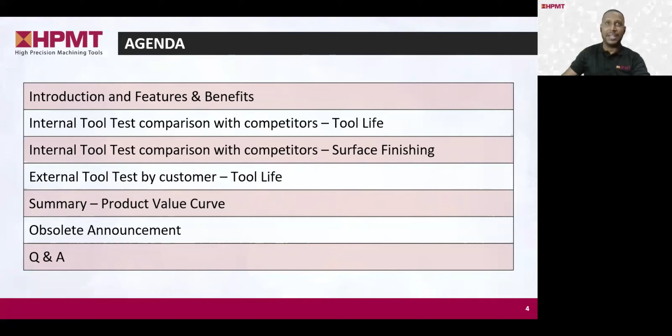Hi everyone, thank you for joining us today. Whether you are a long-time partner or new to HPMT, we are glad to have you here. Now today, as Mark was saying, we are thrilled to introduce a game-changing tool, which is DM70X. With us now is our R&D engineer, our product specialist, and also our sales team member. We are all here ready to provide answers to your questions, not only during this session, but also after today's event. So do make an appointment with us for more insight about DM70X or any HPMT products.

As you know, our journey with the DM70 series, which was launched 2.5 years ago, has seen impressive traction and remarkable results, widely adopted both in Asia and Europe. Through continuous upgrades in our equipment and production system, we discovered even greater potential for enhancing this tool line. Our rigorous tests have shown breakthrough performance with this new DM70X, achieving results that rival and even surpass some of the global leaders in this segment.

We are very proud of this achievement and are thrilled to introduce to you today the new DM70X, an innovation that sets a new benchmark in performance and reliability. Okay, let's get started.

Machining hardened steel is a fundamental process in the mold and die industry and plays a vital role across a range of sectors, including plastic injection for mold bases and cavity inserts such as plastic bottle molds, automotive for forging dies like connecting rods as well as molds for car lamps, semiconductor for lead frame IC molds and heat sink dies, and dental and medical for dental prosthetic dies including orthodontic brackets and artificial tooth molds, as well as surgical instrument molds. This application demands high precision and exceptional durability, making the cutters a key factor in overall performance.

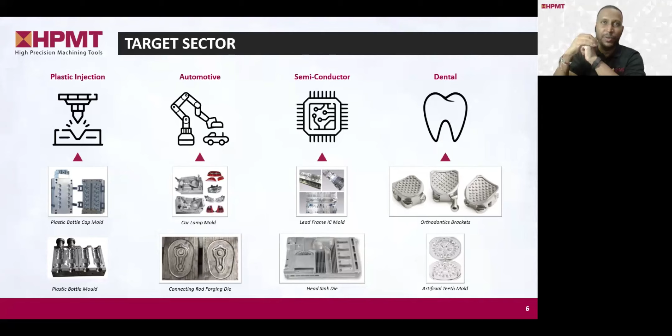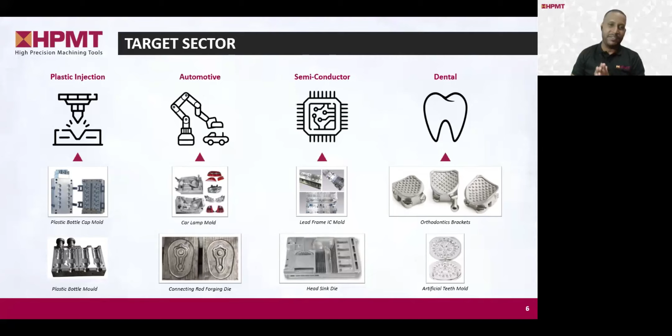Thank you very much, Mark. That was a great introduction to the series. There are three main benefits of HPMT's new DM70X series. Firstly, the extended tool life you will get, which means maximum uptime in your machining and fewer tool changes required. Next is a superior surface finishing on the workpiece, thus needing minimal post-processing after your machining is completed. The DM70X also offers complete tooling coverage for every operation for all of your machining needs.

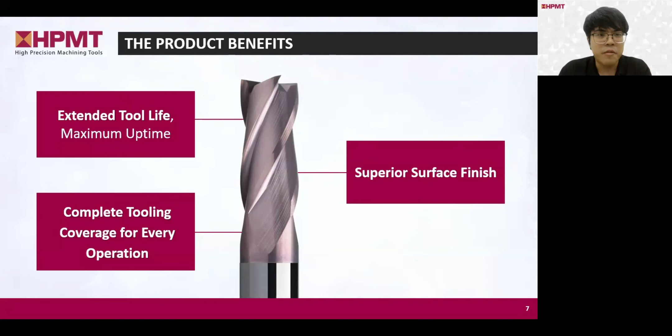Moving up to the features. Firstly, we use a new and improved B0909X coating with higher silicon content. This provides higher heat and wear resistance when machining hardened steels, which results in significantly longer tool life for the tools. Maintaining tool performance under high-speed conditions is also an additional benefit of this new improved coating. The new coating also has better adhesion, smoother surface, and provides better chip evacuation, and the smoother surface is even visible to the naked eye, as you can see in the image.

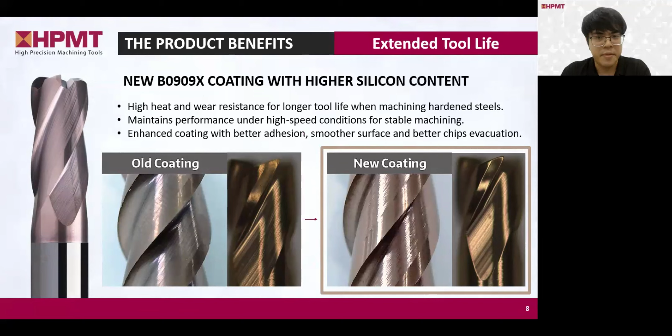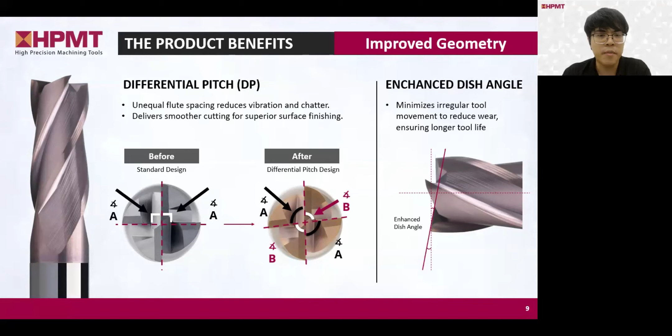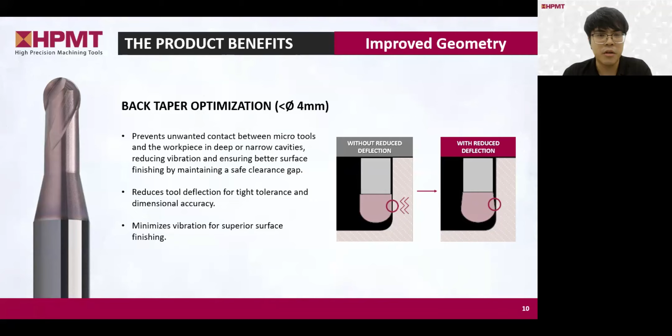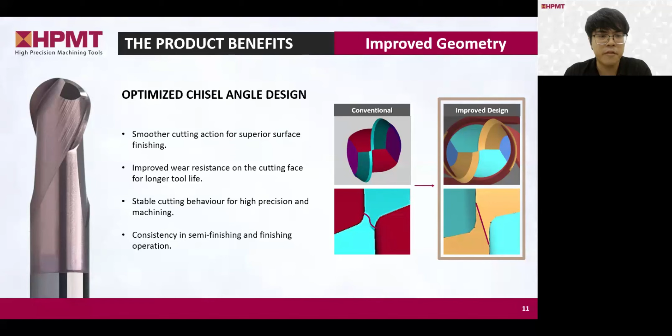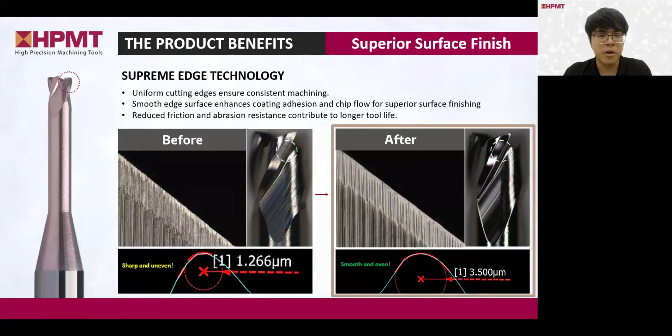Thank you, Adam. Now let's have a closer look at one of the most exciting features of our DM70X, the Supreme Edge technology. As we all know, the cutting edge is one of the most critical aspects of any cutting tool. Its uniformity and precision directly impact performance, tool life, and surface finishing quality. Thanks to the dedicated efforts of everyone involved in this project, we have successfully developed the Supreme Edge technology, a breakthrough that enhances performance, tool life, and surface finishing.

With this technology, we are able to achieve a smoother micro profile on the cutting edge, eliminate micro defects caused by the grinding process, and significantly boost wear resistance. As illustrated in the 3D image, the untreated edge appears sharp but uneven. In contrast, with Supreme Edge technology, the edge is noticeably smoother and more uniform.

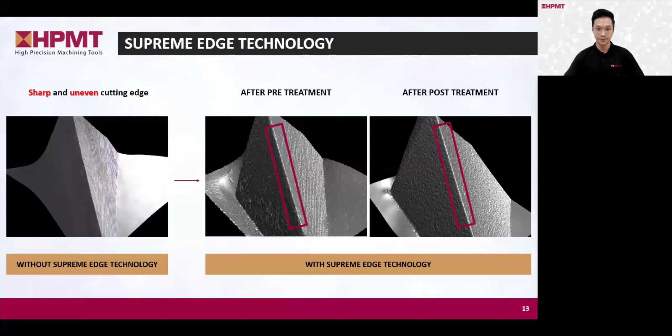Now let me show you something even more interesting on the next slide. Here you can see these highly detailed 3D images that reveal the intricate microstructures of the cutting edge, offering valuable insights that enhance our technical understanding. In 2024, HPMT made a significant investment in a high-precision laser microscope. This advanced equipment not only enabled us to develop and implement the Supreme Edge technology, but also gave us the ability to precisely alter and measure the micro profile of the cutting edge to meet specific application requirements.

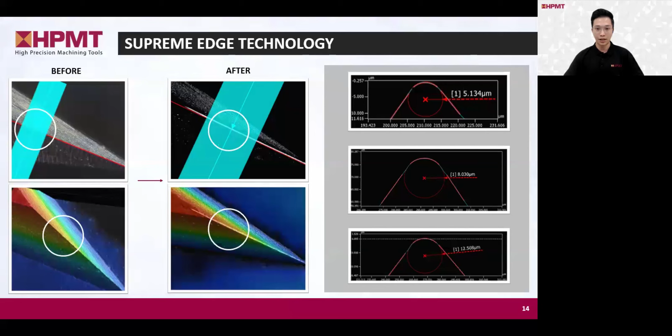Now, back to you, Mark.

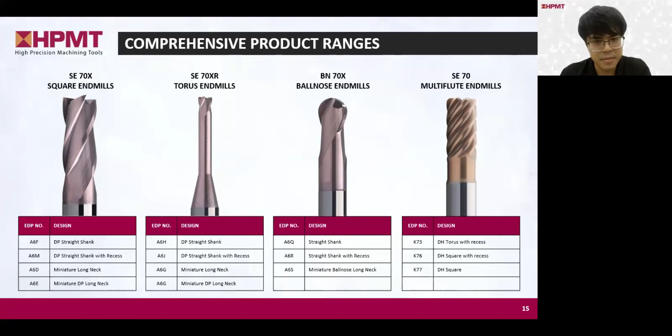So the third poll for today is: which is the most common tool type variant in your region within this machining segment? As you can see, there's straight shank, recess, welded. You can choose more than one option.

So for now, as you can see, straight shank and recess is being selected the most. There are also selections on welded and recess and welded. All right, I'm going to end the poll right now. Okay, I'm going to wait for a while because I still see there are inputs coming in. All right, I'm going to end the poll. Here are the results.

As you can see, as expected, standard and recess variants are the most commonly used, while welded and recess plus welded are not so common in the market. However, it's still being selected. Even though these welded and recess welded variants are not available in our standard range, we are fully capable of producing them. If there is demand for this variant, just reach out to us and we will be happy to coordinate the arrangement with you.

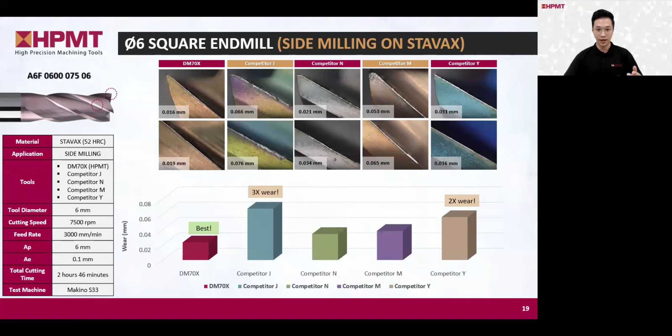Next, let's move on to the diameter 6 end mill side milling test conducted on the harder material SKD11 with 58 HRC. Here are the cutting parameters we used for this test: cutting speed 8,000 RPM, feed rate 4,000 mm per minute, cutting depth 6 mm, and cutting width 0.1 mm. The highlighted area on the tool indicates the specific region we focus on for wear rate observation.

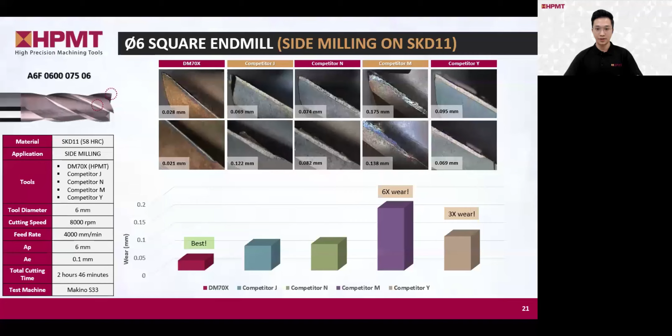The images shown represent 2 critical points: the starting section of the cutting edge and the end of the cutting depth of 6 mm area. As you can see, when working with the tougher 58 HRC SKD11 material, the DM70X demonstrates an even greater advantage in both wear rate and tool life. The visual evidence clearly tells us just how impressive the DM70X performance is.

Moving on to the next one, we'll take a look at the diameter 6 torus end mill face milling test conducted on 52 HRC STAVAX material. Here are the parameters of this test: cutting speed 7,500 RPM, feed rate 2,800 mm per minute, cutting depth 0.1 mm, and cutting width 2.7 mm.

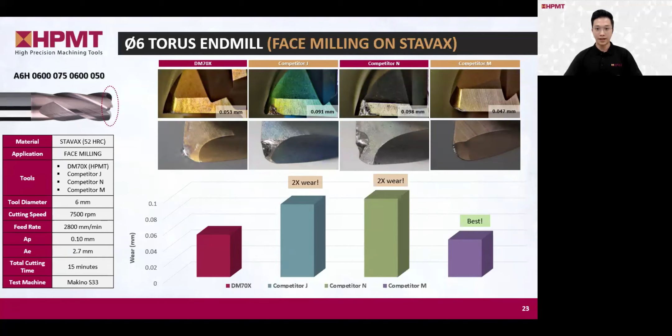In this test, our focus is on the circled area at the top of the tool, which we internally refer to as the end face. The images presented are magnified views of this specific region to provide a clearer observation of the wear patterns. Based on the results, DM70X performs on par with competitor M and significantly outperforms the other two competitors, J and N, which showed nearly double the wear. Since wear rate is always closely linked to surface finishing quality, and torus end mills are often used in finishing operations, DM70X proves to be a highly suitable and reliable choice.

Proceeding to the next test, we'll show you the diameter 6 torus end mill face milling test on SKD11 with 58 HRC. In this test, the SKD11 material presents a higher level of hardness, which poses a greater challenge for all the tools. The tools were tested under cutting speed 7,500 RPM, feed rate 2,800 mm per minute, cutting depth 0.06 mm, and cutting width 2.1 mm.

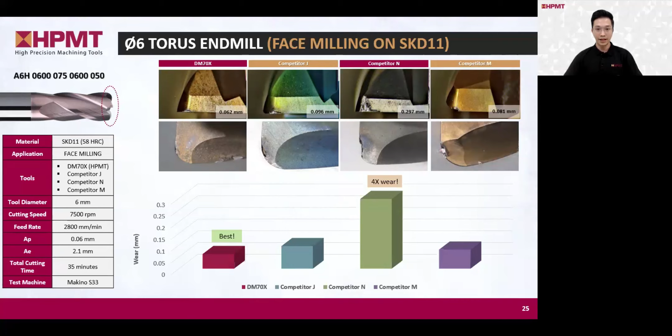The competitor that performed on par with DM70X in the previous STAVAX test could not maintain the same level of performance under these cutting conditions. As for the other two competitors, their wear rates were significantly higher, with competitor N showing nearly 4 times the wear compared to DM70X. This performance gap is even more obvious in the visual comparison, clearly reinforcing the advantage of our DM70X.

Next, we will look at the test result for ball nose endmills, a very critical tool in the mold and die industry. We will begin with the diameter 6 ball nose, followed by diameter 1. So now let's start with the diameter 6 ball nose face milling test on STAVAX material first.

In this test, the tools are tested under cutting speed 9,000 RPM, feed rate 3,000 mm per minute, cutting depth 0.08 mm, and cutting width 0.07 mm. Under these cutting parameters, DM70X delivered the best performance, recording the lowest wear rate among all the tools tested. Competitor N and competitor M follow very closely with good performance as well, showing only slightly higher wear. However, competitor J and competitor Y display a much more noticeable gap in terms of performance, with wear rates nearly 3 times higher compared to DM70X. I believe the close-up view images of the tool condition can help everyone understand the differences better.

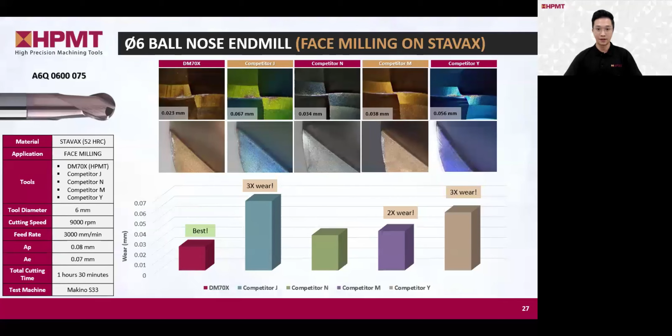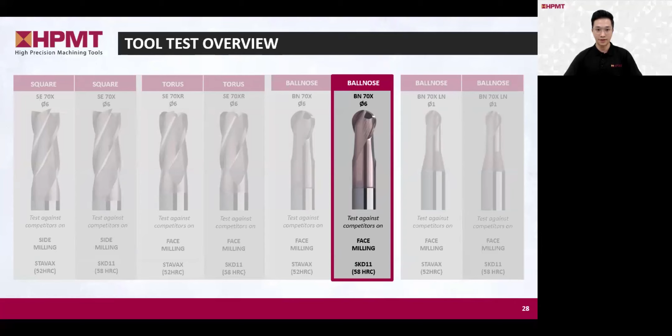Now, let's continue with another diameter 6 ball nose face milling test, but this time it is tested on the more challenging SKD11 with 58 HRC. Once again, DM70X demonstrated outstanding performance on harder materials like SKD11. The cutting parameters are cutting speed 9,000 RPM, feed rate 3,000 mm per minute, cutting depth 0.06 mm, and cutting width 0.07 mm. The wear rate and tool life clearly outperform the other market-leading tools. Even from the visual comparison alone, it's very impressive to see that the competitors are not performing at the same level as DM70X in this test.

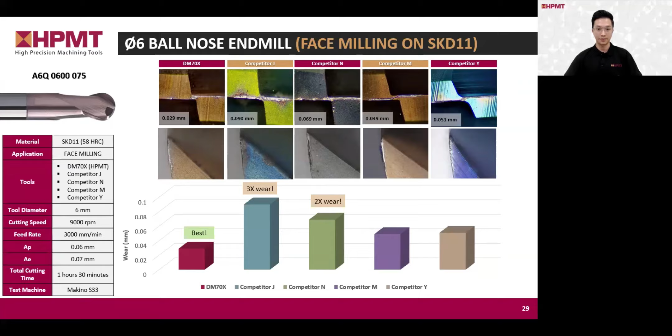Thanks to the integration of the new chisel angle, the impressive Supreme Edge technology, and also the enhanced B0909X coating, DM70X truly delivers very outstanding performance. Up to now, I think we have shown quite a few tool tests for bigger diameter. Maybe some of you might be thinking, what about the performance of smaller diameter tools, right?

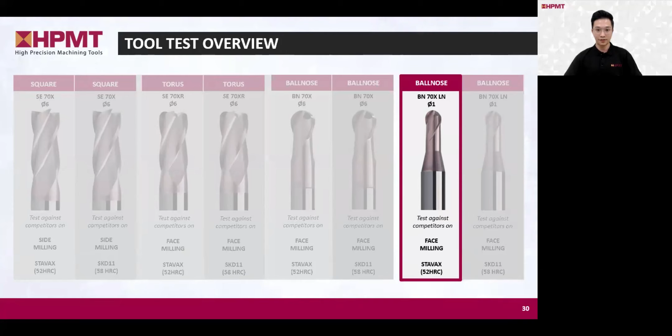So now let's switch to the diameter 1 ball nose face milling test on both Stavax and also SKD11. We will begin with the result of Stavax first. In this test, all the diameter 1 ball nose tools are tested under cutting speed 30,000 RPM, feed rate 1,800 mm per minute, cutting depth 0.02 mm, and cutting width 0.03 mm.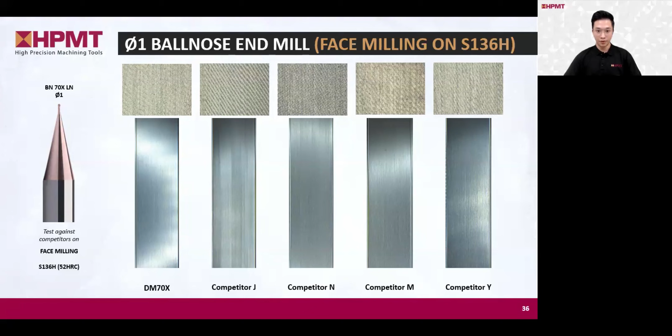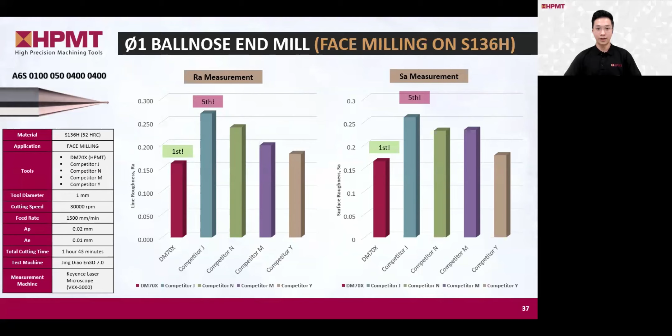Apart from the visual comparison I just showed, we also conducted a surface finishing analysis on the workpiece surface machined by each of the tools, and here are the measurement results. It is presented in two forms: line roughness RA and surface roughness SA. In both measurements, DM70X stands out as the clear winner, demonstrating superior surface quality compared to the other tools.

The results presented in the two tables clearly highlight the outstanding performance of DM70X, achieving an impressive RA of 0.16 micron and SA of 0.165 micron. Here is a clearer side-by-side comparison of DM70X with the competitors so you can visualize it better.

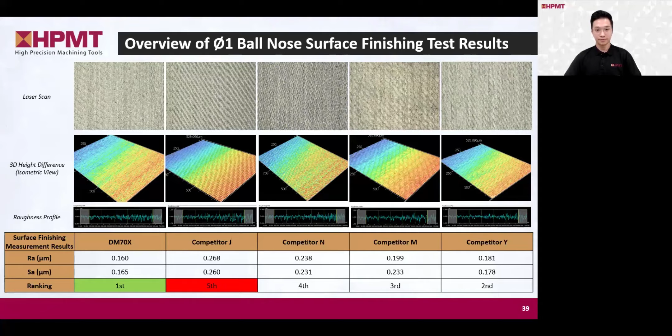Last but not least, let's take a look at the surface finishing for diameter 6 ball nose on S136H workpiece. In this test, we use the diameter 6 ball nose to perform a face milling finishing process on S136H material. Next up, I will show you how DM70X is performing compared to the rest of the competitors here.

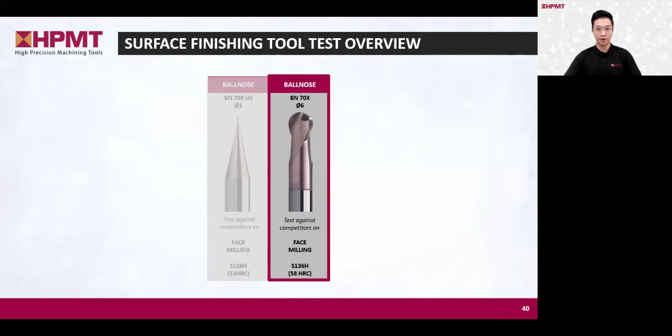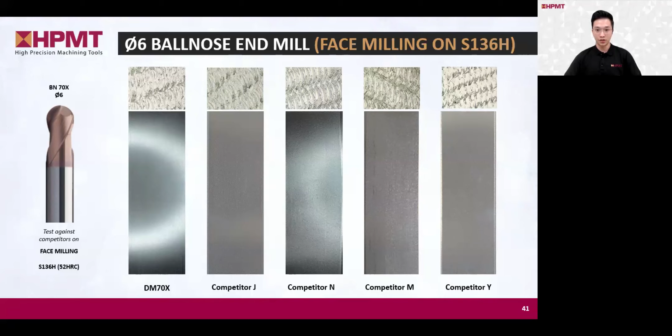Looking at the workpiece itself, we can clearly tell that DM70X is the winner. This is also verified again with laser microscope and 3D laser scanning patterns that show us the same result. The shape formed by the cutting process on the workpiece surface is smoother in DM70X compared to the rest. Visually, we can say that DM70X has good surface finishing as we can see bigger light reflection and a shiny surface.

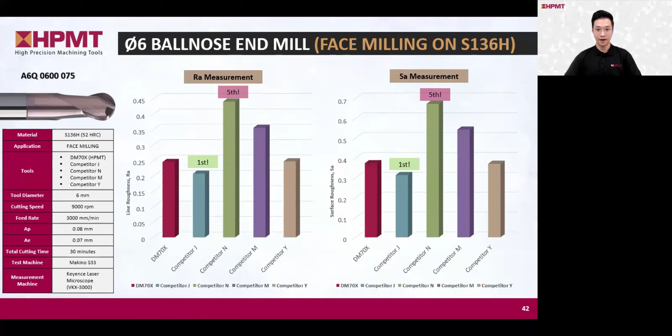As shown in the graph, DM70X, competitor J, and competitor Y deliver nearly comparable top-tier surface finishing measurements, while competitor J records a slightly better and lower value. It's important to remember that the actual surface finishing condition on the workpiece demonstrated just now tells a more complete story. So combining both visual and measurement results, competitor J and DM70X are the two top leading performers. In contrast, competitor N recorded the highest RA and SA values, showing the roughest surface among all tested tools.

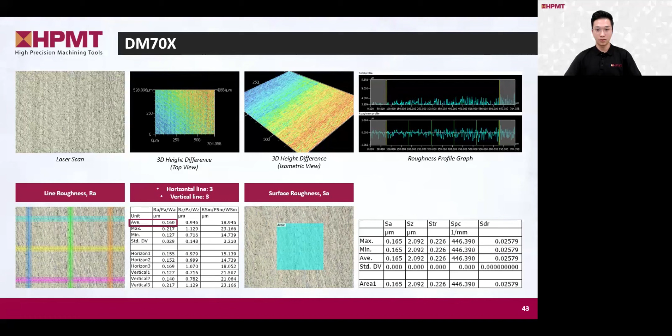Here is a side-by-side comparison of the DM70X against its competitors to give you a clearer overall picture. To summarize what I've just covered, the DM70X delivers outstanding performance in both wear rate and tool life, as demonstrated through our extensive internal testing. In addition to its durability, the DM70X also excels in surface finishing, setting a whole new benchmark in its class. I hope my sharing has been informative and helpful in deepening your understanding of the DM70X and the value it brings to your machining operations. Back to you, Mark.

Thank you, Jet, for sharing the benchmarking results on tool life. It's clear we've come a long way from our earlier versions like the SCBN60 and the original DM70. We've seen strong performance on materials such as Stavax at 52 HRC and SKD11 at 58 HRC, which from my understanding are among the most commonly machined hardened steel materials.

But Jet, have we tested our DM70X on even harder material? Maybe something closer to 70 HRC?

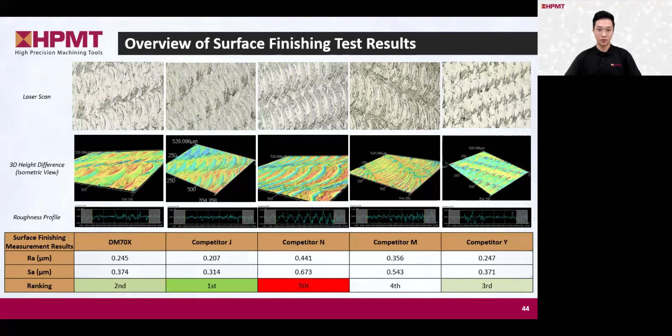This is a very good question, Mark. I believe some of us here have the same question. So for this, we also conducted an internal test on an even higher hardness material, Vanadis 23, which has an HRC value up to 67. You can see that even after 2 hours of machining, the tool is still in very good condition, and no doubt it can continue further. The wear is only about 30 microns. So let me assure all of you again that DM70X tool life is truly remarkable. I wish I could share more today, but due to time constraints, I have to stop here. Back to you, Mark.

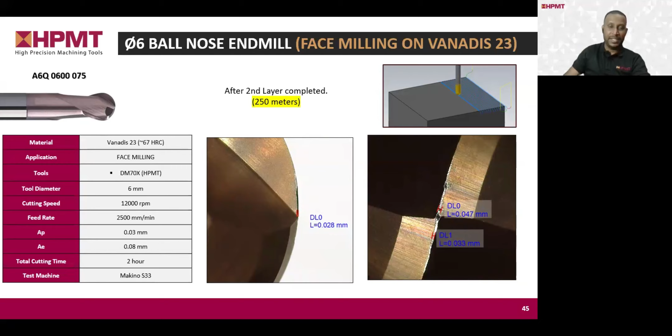Wow, that's quite impressive. Thank you for the great insight. Now it will be interesting for us to learn more about the material hardness you typically work with in your region. Let's move on to our fifth poll for today.

So the fifth poll is: what is the typical hardened steel material hardness range in HRC that you commonly machine in your region? For this, you can select more than one option.

Okay. Okay, I'm going to end the poll, and here are the results.

I'm going to end the poll, and here are the results. As expected, the majority of you selected 50 to 60 HRC, which is indeed very common in the mold and die industry based on our understanding. We'll close the results now. However, we also notice a number of you selected 60 to 70 HRC, which is great to see. We have tested the DM70X on material in the higher range as well, and the results have been very positive. So if you're working with ultra hard steel, you can use the DM70X with confidence.

Thank you so much, Mark. Before we dive into the external tests, just a quick summary of the tests by our customers. These two tests were done by one of our reputable customers in the medical mold industry, using both our Torus end mills and ball nose end mill. Both tests were done on S136H material with a hardness of 52 HRC.

For the first test, here are the results with our A6H Torus end mill. The tool was used for a total cutting time of 4.5 hours, and at the end of the cutting, our customer gave us feedback that the A6H has low wear rate and long tool life, with an average end face wear of 20 microns and good surface finishing on their workpiece. You can also see in the 4 zoomed-in images on the right that the flutes are still in visibly good condition.

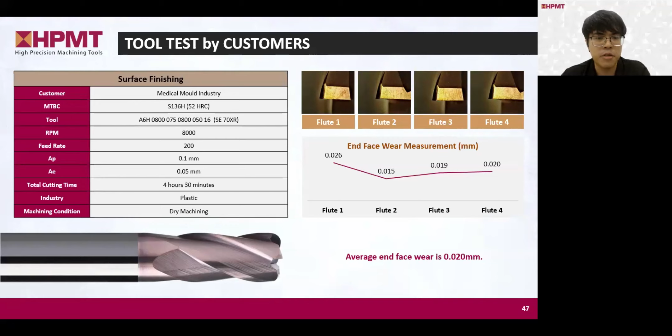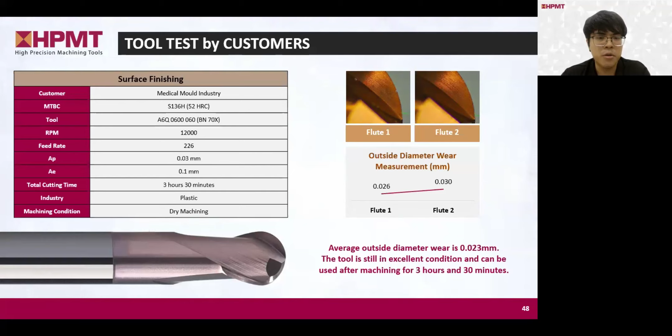Moving on to the second test, here are the results with our A6Q ball nose end mill. The tool was used for a total cutting time of 3.5 hours, and at the end of the cutting, the A6Q only has a wear of 23 microns on the outside diameter. Similarly, in the zoomed-in images, you can see that the flutes are still in very good condition. We've gotten feedback that both tools are still good to be used on a second component. We have more external tool tests, but due to time constraints, we'll have to conclude the tests here.

And now I would like to show everyone a video of the DM70X tools in action.

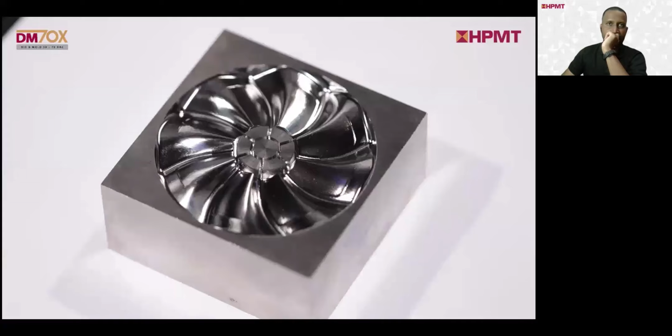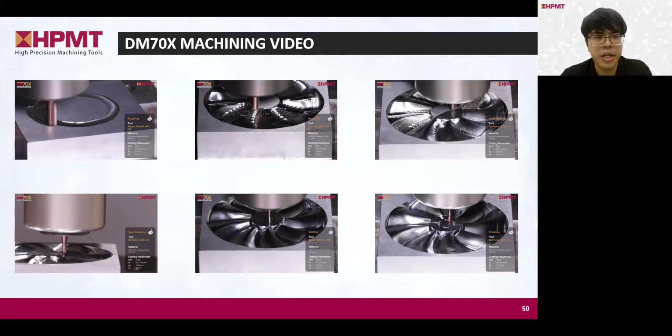Now let's break down the video a little bit. What you just saw was 6 of our DM70X tools in action, ranging from square, Torus, ball nose, and miniature long neck ball nose end mills in different applications from roughing, semi-finishing, slotting, finishing, machining a workpiece from a complete block into a mold.

This is an actual request from our customer in Malaysia to simulate actual machining of a CPU fan mold on S136 material. This would be the performance you would be expecting in the real world scenario.

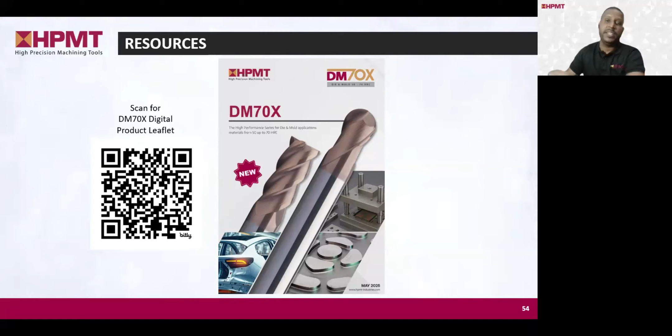Most of the common sizes are readily available, so feel free to reach out and place your order for testing. We are confident that whoever is using this tool would be very impressed.

I'm sure some of you are currently using our S16, DM70, and SCBN60 tools. As the saying goes, when one door closes, another one opens. With the launch of the DM70X, we would like to officially announce that production of both the DM70 and SCBN60 has been discontinued. Moving forward, we will be focusing exclusively on the DM70X product line. For those who are still using this soon-to-be discontinued series, we strongly encourage you to transition to this new DM70X. The best part? You will enjoy superior performance at the same price as the previous DM70 and SCBN60.

If you have any concerns or face any challenges during this transition, please do not hesitate to reach out to us. We will be happy to work closely with you to ensure a smooth and successful switch.

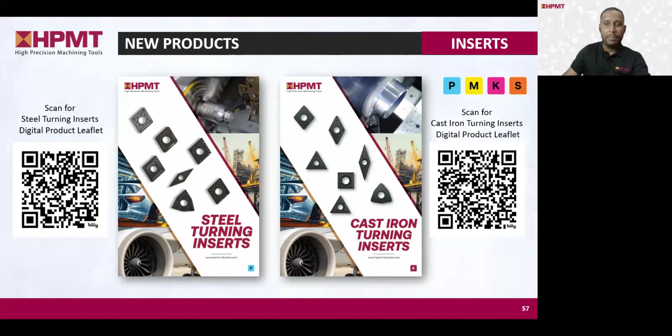Second, coming tentatively in Q3, our new 9-flute multi-flute tool, designed for fast roughing with reduced tool wear in high efficiency machining. We're excited to introduce this tool in 2 performance lines. Optimum line, designed for the general purpose market for below 40 HRC, will come in 2 variants, standard and long, starting from diameter 8 to diameter 20.

Nitico series, tailored for high performance applications below 52 HRC, will come in 4 different variants: standard, long reach, long with chip breaker, and extra long with chip breaker, from diameter 8 to diameter 25. If this is something you are interested in or see potential in your region to test, let us know. We will be happy to coordinate on providing some samples for testing.

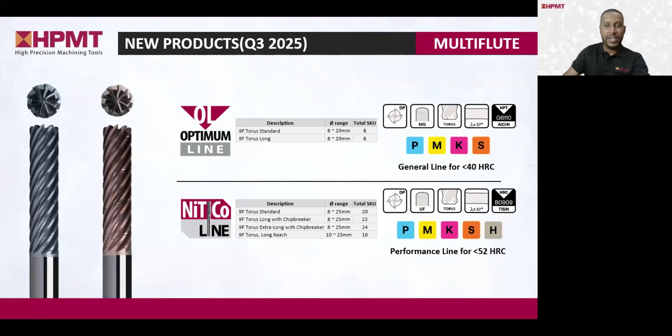Next up, also launching tentatively in Q3, our upcoming high-feed series, designed for high metal removal rates using low depth of cut and high feed per tooth. This series will be available in 2 lines: Nitico series for materials below 52 HRC, available in 3 variants: standard, long, and extra long, ranging from diameter 1 to diameter 25.

Extension from the DM70X for hardened steel from 50 to 70 HRC, which will also come in 3 variants: standard, long, and extra long, ranging from diameter 1 to diameter 16. Similar to the multi-flute, if you'd like to evaluate this new high-feed solution, reach out to us and we will be happy to coordinate on providing some samples for testing.

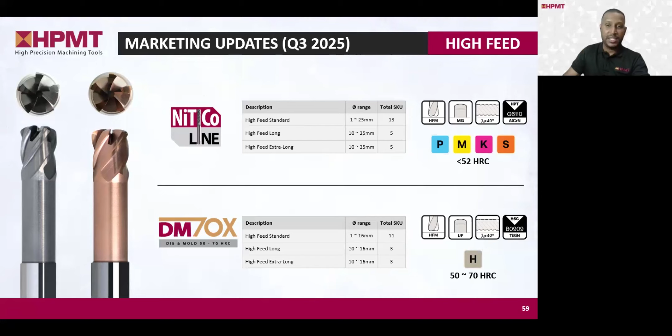Lastly, HPMT Tool Advisor. It was launched in May last year. This powerful tool selection platform is something I strongly recommend. Here is what you can do with the Tool Advisor: easily find the right tool based on your specific application and requirements.

Secondly, access complete tool specification sheets and cutting parameters tailored to your target material, with the option to download them in Excel or PDF format for easy sharing. Thirdly, instantly download tool drawings in 2D DXF format and also 3D in STP format.

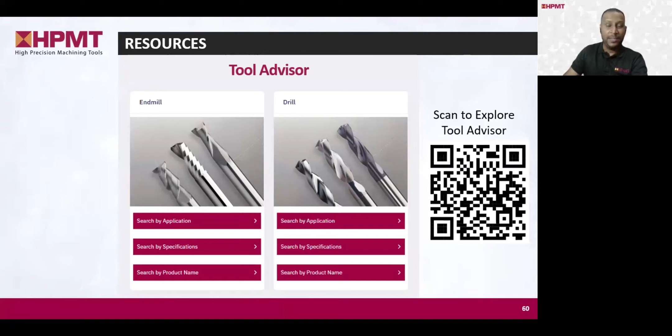Now that we have launched the DM70X, all 1,329 SKUs have been fully updated and available in the Tool Advisor. We are also working on enhancing the user experience, with updates rolling out in July. If you have any feedback or suggestions on the usability, we would love to hear from you. That's all from the marketing updates.